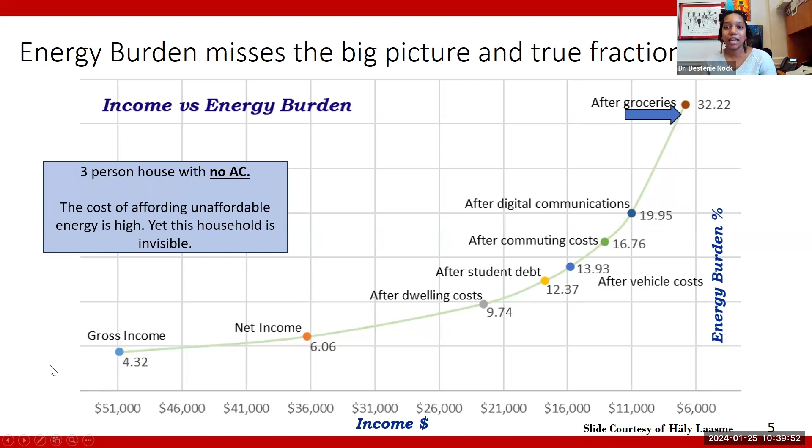So what can we do about this? How can we measure it? So household meters are widely deployed, but super underutilized. And a household electricity meter is just a little box outside your apartment or outside your home, which measures how much electricity you are taking from the grid at a given time period. Sometimes these occur at a 15-minute time period. Some of them look at the monthly time period.

So in 2021, the US had deployed around 111 million advanced smart metering infrastructure installations. This is roughly 69% of all houses having electric meters. Now, residential customers accounted for about 88% of total advanced metering installation. So one good thing about this is that both low income and high income households have meters widely deployed. Utilities are actually deploying these things to houses.

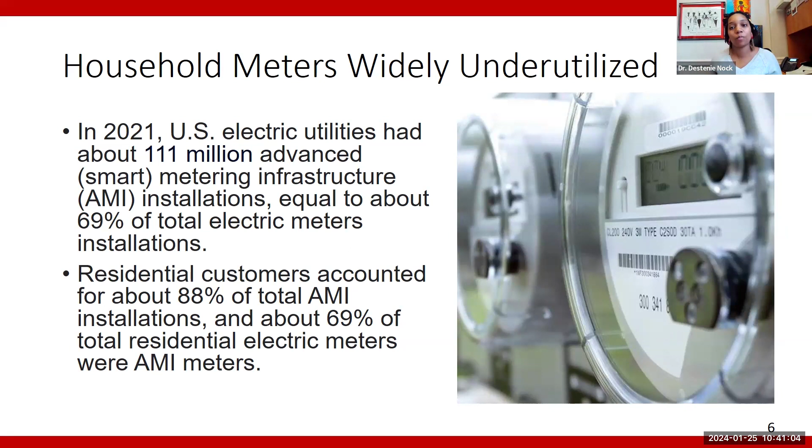And so this gives us a really, really good data set to see how much electricity people are using throughout the year, at a 15-minute and sometimes even 5-second interval. So you get a really high quality data set.

So for our research process, what we do is we start with the household level utility data from those smart meters. We then match the household level data with a demographic survey. This is going to tell us information about the income, the race, some household characteristics. And then we also are gathering local temperature data. So we need to know the outdoor temperature so that we can then tie that to energy use.

Here in this talk, I'm going to focus on calculating the slopes of energy usage over the summer. So we're going to be looking at how people are using energy as they're moving into heat wave territory. And then from that, we'll calculate the cooling slope gap to identify if there are any inequities in our system.

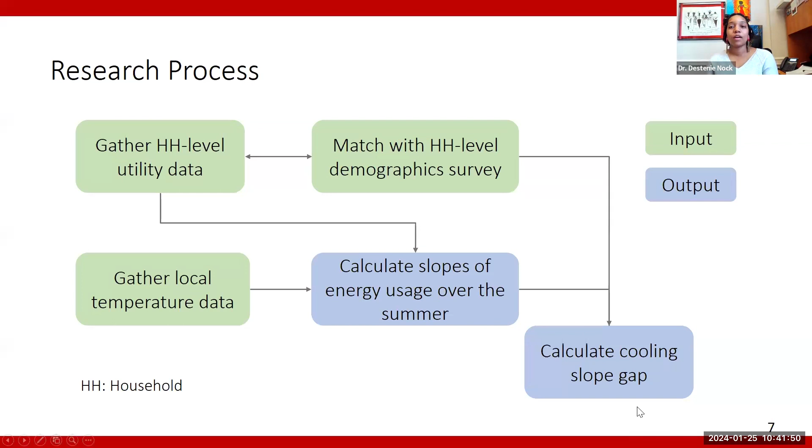Our study area is the greater Phoenix, Arizona area, which is in this red box in case some of you don't know where Arizona is. So just to give you a sense of the climate, it's very long, hot summers, and our analysis is of about 4,000 households in the Salt River Project region. And here, our assumption is that in the South, households have working air conditioning infrastructure. It's something the utility assumes, and so that's why we have that assumption here.

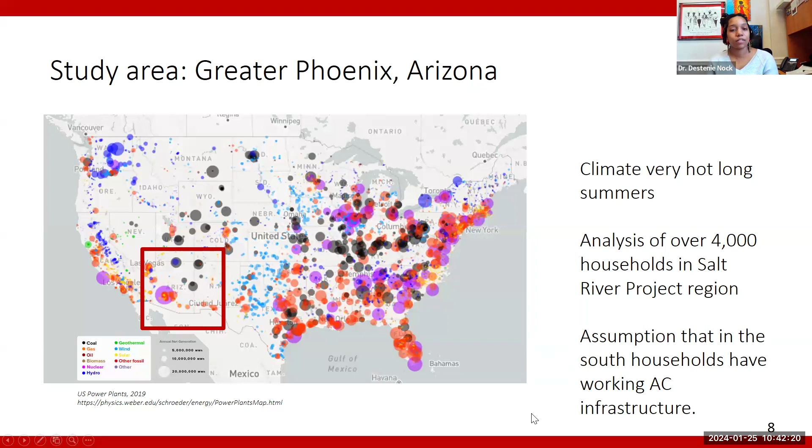Now, our previous work focused on the cooling balance point, the first temperature at which you turn on your cooling system. And if you want the papers, these are the two papers from our previous work, Kwon et al. 2022 and Huang et al. 2023. So we have electricity usage in households on the y-axis. We have outdoor temperature on the x-axis. This is our high-income household in black. And we found the cooling balance point. Again, that's the first outdoor temperature at which a household turns on their AC unit.

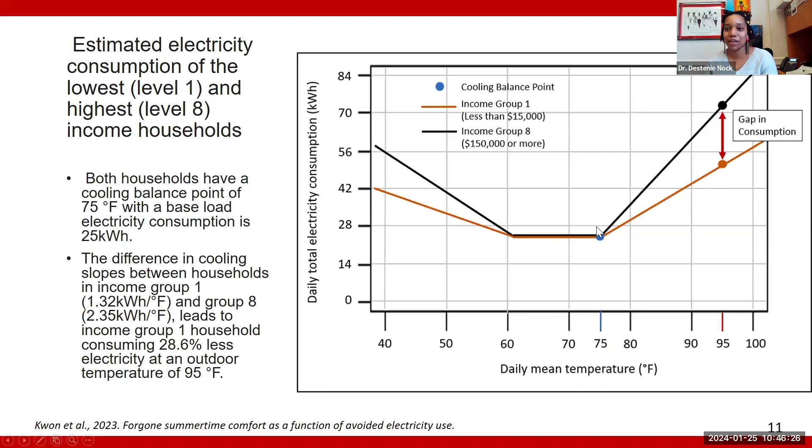And so you might be asking yourself, well, how hot is this really? Like, why 75? Why does that even matter? Well, in Arizona, when we're looking at a cooling balance point, so that first turn on point of about 78 degrees Fahrenheit, the maximum outdoor temperature, as reported in the Phoenix Airport weather station in 2022, was around 90 degrees Fahrenheit. So even though the daily mean temperature is 78 degrees Fahrenheit, the maximum temperature is 90 degrees Fahrenheit.

And so that really does highlight that people actually can be at risk depending on how much shading their house has, their building characteristics, if they have insulation in their homes, and if they have medical needs, right? And so that's why, even though 78 degrees might sound low, actually the high temperature of the day is going to be much higher than that.

So then what we did was we compared it with energy burden. So here we have energy burden on the y-axis. And again, that's the percent of your income that you spend on your energy bills. On the x-axis, we have the income groups where 1 is the lowest and 8 is our highest income group.

And then this first plot here represents those with a low cooling slope. So this can be houses that don't have a centralized air conditioning system. They can be houses with window units or just fans, for example. So one of the things that we notice here is that households with low cooling slopes tend to have energy burdens less than 10% for almost all income groups, meaning that when we use energy burden as the main mechanism for determining who's energy poor, we're missing everyone who doesn't have an air conditioning unit.

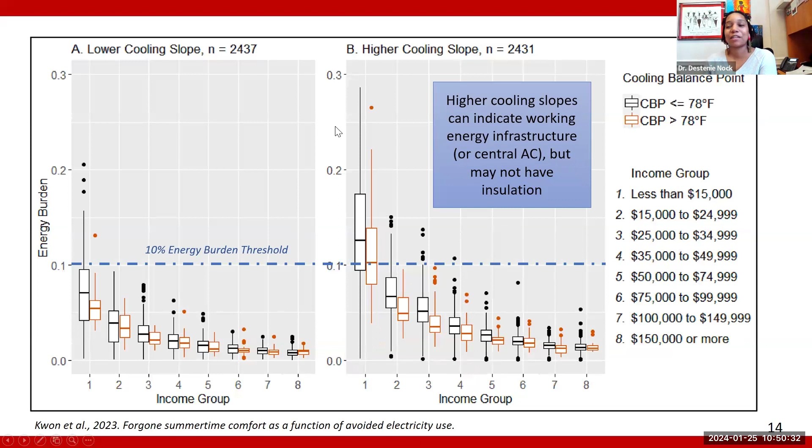So given that I just mentioned energy efficiency as one of the mechanisms that can help, we did try to take a look at how AC efficiency differences might lead to different cooling slopes. So here we have in plot A a SEER rating of less than 14. So that would indicate that the house is going to have a pretty inefficient system. And it has only one air conditioning unit as told to us by the utility. And so this has roughly 201 households in our sample size.

Cooling slope is on the y-axis, income group is on the x-axis. And what we see here is that the slope gap between group 1 and group 8 is around 0.74 kilowatt hours per degree Fahrenheit. And then when we looked at really efficient systems, we do see that overall people are having slightly smaller cooling slopes, right? So SEER here of 14 to 30, that represents a pretty efficient unit. But we see a similar slope gap between our lowest and highest income groups of about 0.76.

And so here, this does highlight to us that it's not just a technology gap of the efficiency of the different technologies being the driver of these gaps, but it's actually an income-based gap, which highlights a greater system level inequity. Now, you might be wondering to yourself, what does 0.74 even mean, right? Like, how big of a difference is that?

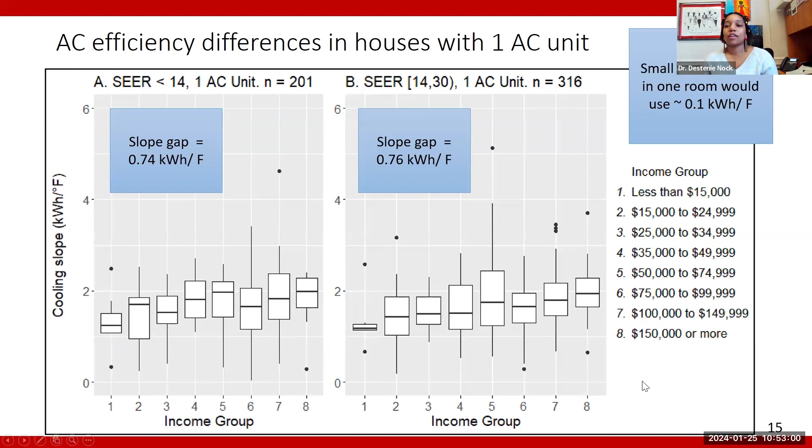So just to give you a quick summary of our Kwon et al. 2023 paper, we had electricity usage in households on the Y, we had outdoor temperature on the X, and we looked at the different slopes here to find the gap between high and low income households. And we found that roughly there was a wide gap where low-income houses are consuming 28% less energy throughout the summer season when you actually put them at a similar cooling balance point.

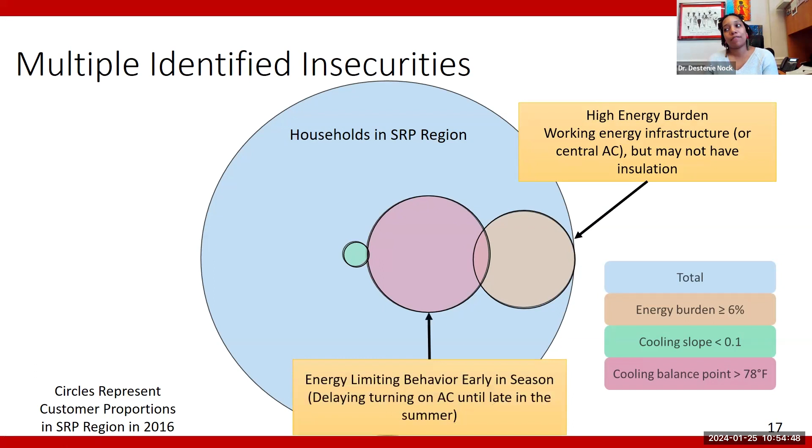And then the cooling slope here is going to be if a household has a cooling slope less than 0.1, which would indicate that the household most likely doesn't even have a small window unit. So for high energy burden, these households most likely have working energy infrastructure or centralized AC, but they might not have insulation. For energy limiting behavior early in the season, this can be delaying turning on the air conditioner until late in the summer. And then the green here is energy limiting behavior throughout the season. So they have a broken or no air conditioning system.

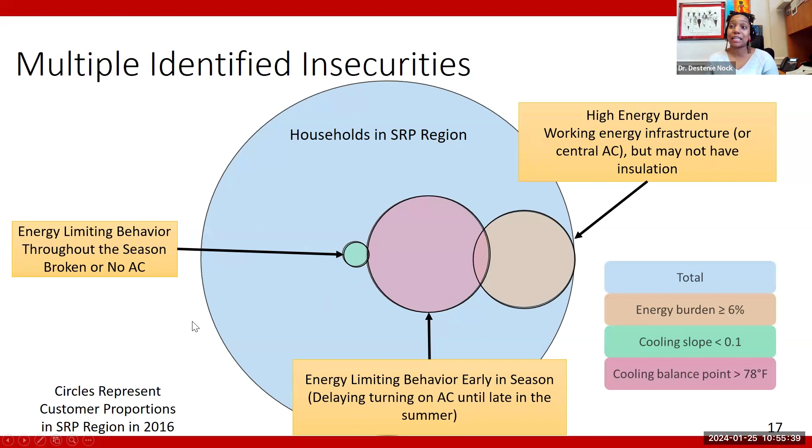And this is super important because in Salt River Project's region in Arizona, the driving assumption for all of their households is that they have working air conditioning systems. And we are saying, hey guys, that's not the case. And it's something that is very vital to communicate, one, to utilities, and two, just as we're planning the energy system, because in the survey that Salt River Project used to give us this information, they asked households if they had 1, 2, or 3 air conditioning units. They did not ask households if you just didn't have one in the first place, or if yours was broken.

And the thing is, we can see how this changes over multiple years in the region in particular. So we have 2016 through 2019. And one of the things that we notice, I'll just highlight this first one in 2016, is that there's minimum overlap between our different circles. And that is something that should be taken into account, that people who are experiencing different types of vulnerabilities and different types of energy injustices need to be helped in different ways. It's not just going to be about giving everyone bill assistance. It's not just going to be about giving everyone energy efficient air conditioning units, but it really needs to be targeted to the different inequities that people are facing.

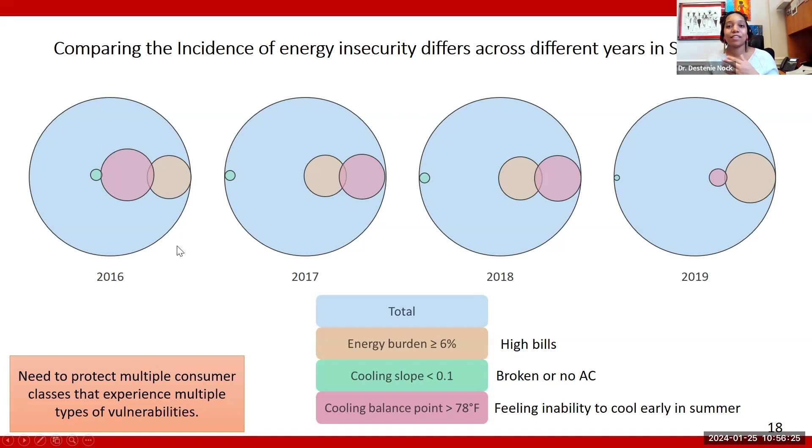So one of the big things here is that we need to rethink our conservation laws that might have unintended consequences. So for example, PA Act 129, as I mentioned before, states utilities cannot encourage households to use more energy, but there are times when houses should use more energy, particularly if it means that they can protect their occupants against heat waves. And even in 2021, we do see that places change. So Minnesota changed their conservation law in 2021 to account for electrification.

Because under this law, PA Act 129, if a natural gas household was trying to change to electric stoves and even to install an electric vehicle charging component at their home, technically this law says that the utilities cannot encourage them to do that. And so now that's why you see places like Minnesota and some other places with these strict laws now making some modifications for electrification.

So one thing that these metrics can do is they can help decision makers identify infrastructure gaps in low-income households, identify the impact of strict conservation laws, and even in high heat areas, we did find that air conditioning consumption gaps occurred because houses were limiting their energy use, and that also hinders their ability to protect themselves against heat waves and extreme temperatures.

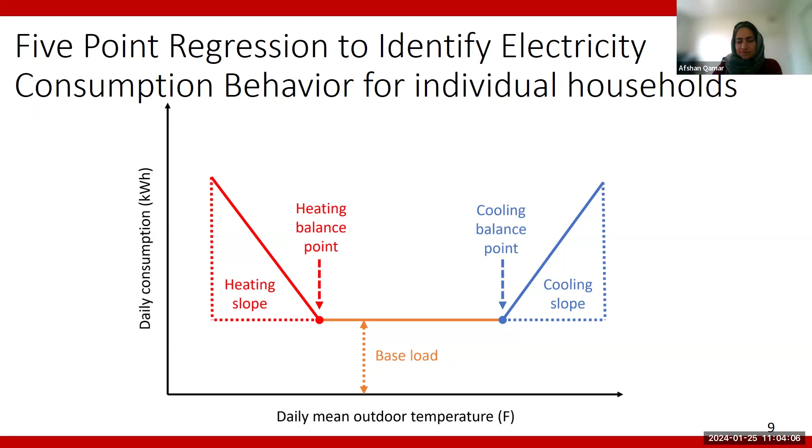We have a range of income. Oh, here it is. So if I unshare this, stop sharing that, and then I can share this other one. Sorry, but it's just like, oh, I have a perfect answer to that. Okay, so let's see, here we go. I share my screen. All right.

Right. And so that was something that we were really looking at: what's our distribution across income? What's our distribution across race and age? And then how is that going to feed into the analysis? So we're not leaning towards one or the other income group. We do feel that we have a good enough range to be able to make some statistically significant conclusions. Thank you.